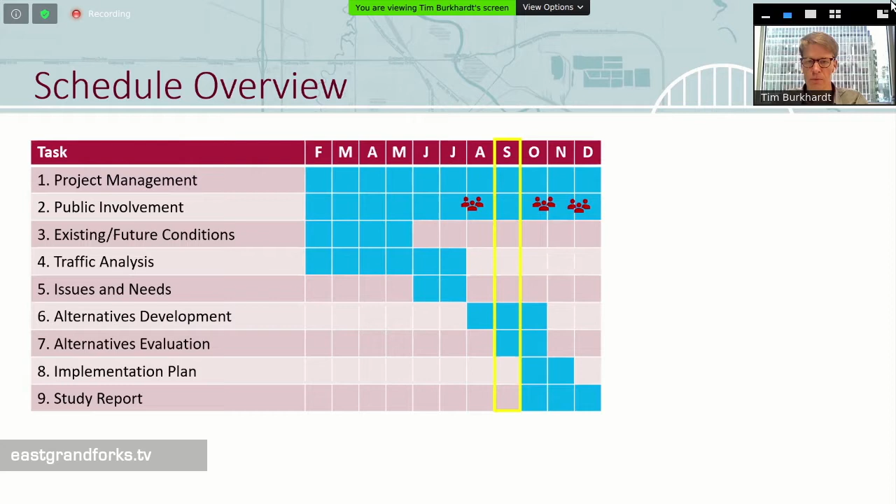As usual, I just do this to review and share where we are. Here we are in September, headed toward being concluded with everything by December. I think we're in a good place, but plenty of work to be done, including our evaluation and sharing those results.

This list keeps track of our consultant deliverables and what we're working on. So we'll talk about the future traffic for the 2 bridge options and the no build, and then where we're headed after this: putting together that direct comparison evaluation and some graphics to pull everything together and see what we've got with the different options.

So that's probably the moment we've all been waiting for, but today it gives a preview of what we're seeing in the traffic results.

So, public open house recap: what we did and what we heard. The purpose was to make sure people are aware of the study, and specifically to share what we call the purpose and need - essentially why we're doing it, what the needs are - and the future traffic and safety information without the project, what we call the no build, and then get input on both of those items.

Recap: we did everything we could to make people aware of the project and the opportunity to participate, with paper and electronic notices and use of our project-specific website. We also did a live presentation - I know a couple of you were there, which I appreciate. This was back in July, which already seems like a long time ago. That was also live streamed, and the presentation was shared on the website, which we kept open for 3 weeks for public comment.

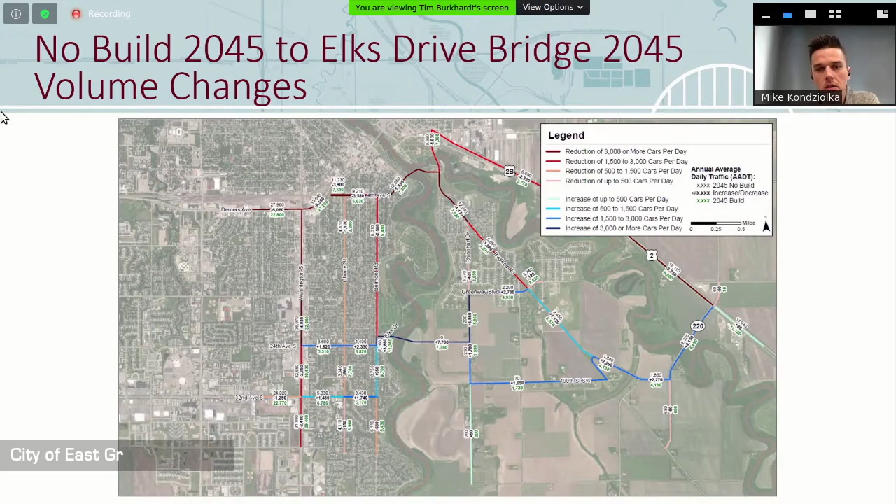We can hop to the next. Part of this little summary here is just to show that for the bridge specifically, most of the traffic that would be anticipated to use the bridge would be using that by the 2030 year. There's not substantial growth that would be expected between the 2030 and 2045 forecast years.

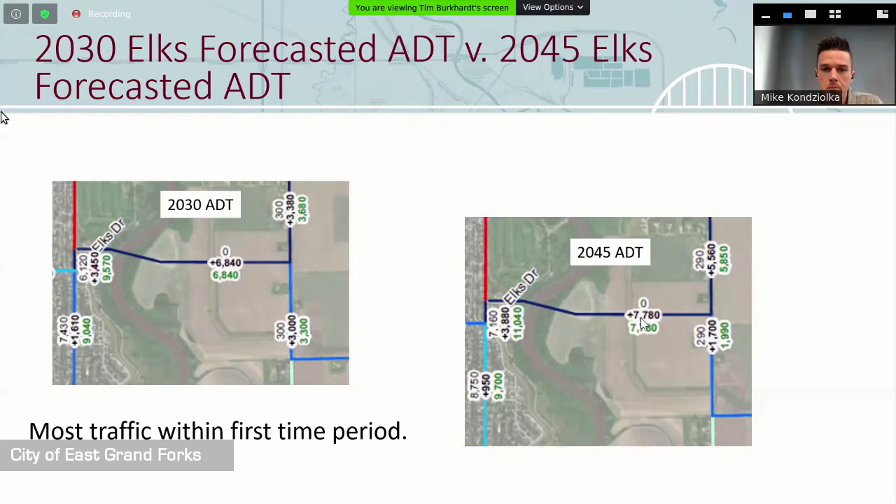I just wanted to highlight that you do see lines that cross the river and represent a bridge location, but I want to make it clear that these lines by no means are a final line that show where the actual bridge alignment will be. It's just a conceptual line showing you how we would connect 32nd over to Rhinehart, and there's a lot of wiggle room as to the exact alignment if and when we do come to construct a bridge at this site. 32nd Avenue is obviously a touchdown point on the North Dakota side.

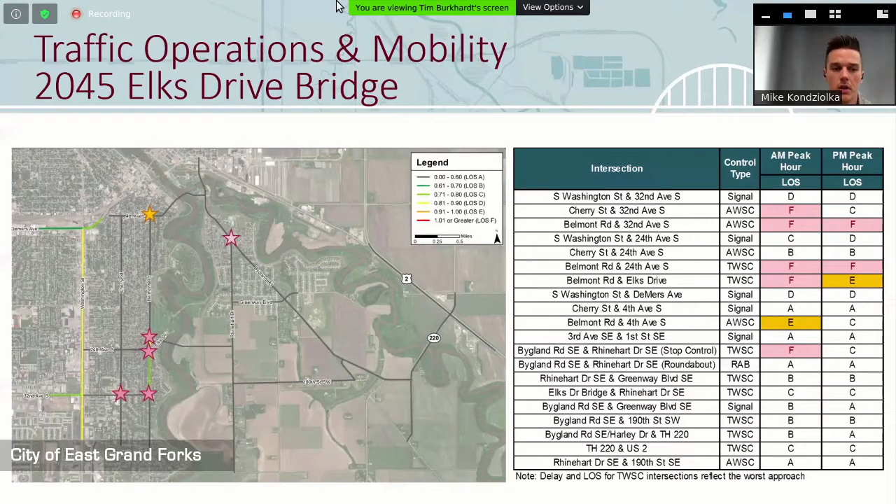No, I think what you're saying is accurate, and it's more reflective of the intersection operations than the roadway segment. So what you're saying is true, and that's what's shown. The delay that would be expected with that movement is showing up here in the models with the level service F at the intersections, so it is being represented. That roadway segment is more looking at it from a daily capacity standpoint — does the roadway have enough lanes to adequately service the daily volume? So it's kind of looking at these from different standpoints, but the peak hour operations at the intersections are showing significant delays at those locations.

Does that make sense, Tanya? Yeah, I drive that every day. If you're trying to turn people left and get people from Belmont, and then offload people, it's a bottleneck anyway, and then that's a really tight space. But anyway. No, that's a good point.

All right, we can look into the 32nd Avenue operations here.

So looking at the 2045 forecast here at 32nd for the 32nd Avenue Bridge, a few different locations are expected to have failing or unacceptable operations in terms of traffic operations.

4th and Belmont is still expected to operate at level of service F in this option. Then on 32nd, both Cherry and Belmont would be at level of service F, and the same conditions over on the East Grand Forks side on Bygland at Rhinehart and Greenway, as was in the Elks Drive option.

Similarly on Washington, looking at the roadway capacity in the segment analysis, similar conditions. We've got level of service D on Washington between 24th and Demers, but no orange or red segments on this by 2045 with the 32nd Avenue Bridge.

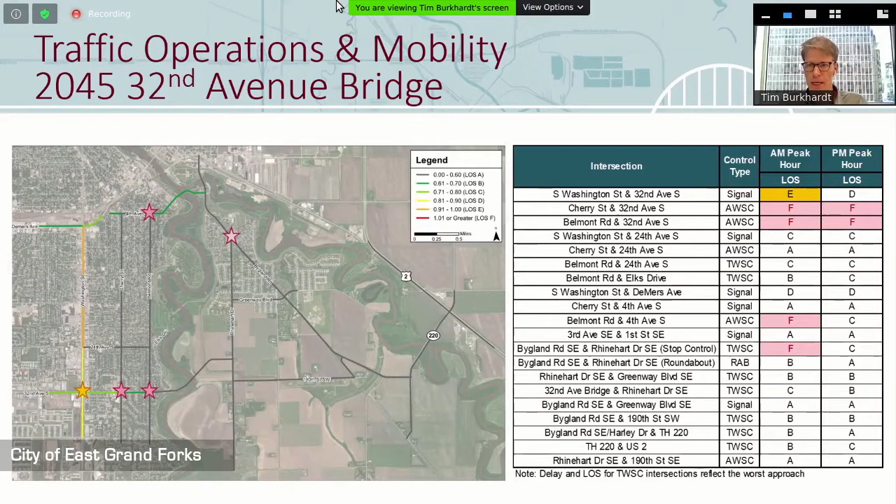Yeah, no, that's the actual question is, when you look at the residential area to the south of that, right, is it not enough of that residential area going south now with the new bridge and utilizing the new bridge? That's really the question.

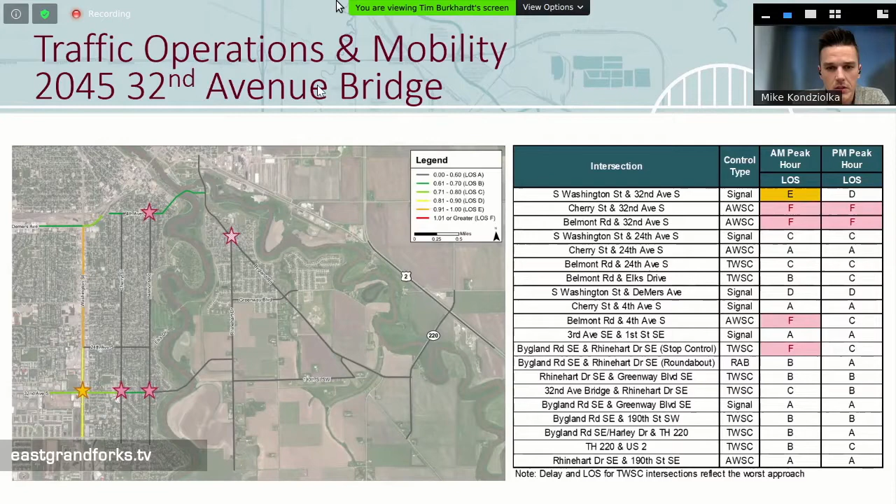I think it's kind of a bigger picture, and less isolated to the specific neighborhood south of here. It's more of a regional shift. There's volumes coming from 220 and from the north as well. This is kind of a summary, so there are volumes coming through here. I think it's more reflective of the fact that the side street stop control on Rhinehart, under any condition, wouldn't be sufficient for 2030 or 2045 volumes.

Got it, okay. And I guess maybe looking at where this intersection is in relation to the existing bridge versus, I guess this is 32nd, I mean just making this up geographically, but the question is will the new bridge pull trips from here to the south rather than to the north? Obviously it depends on where they're going, but it's sort of somewhat equidistant, so I guess we wouldn't necessarily expect them to all peel off and go the other way, right?

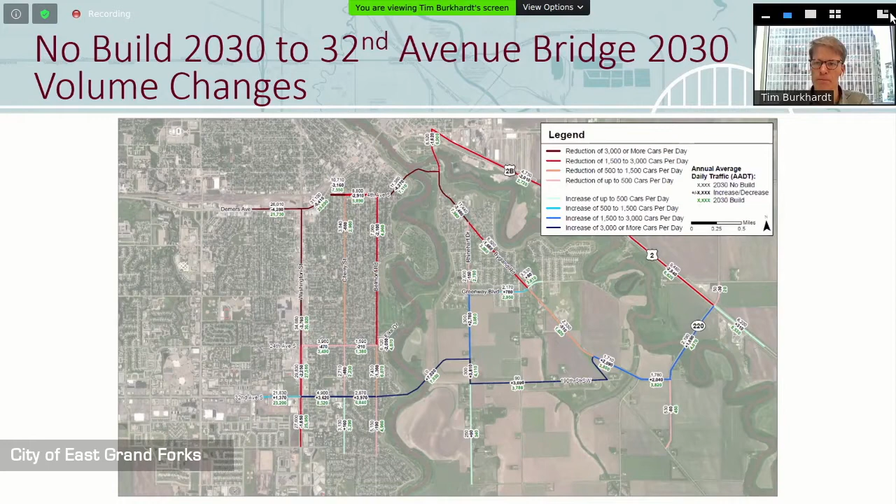Okay, get back to where we were. So how about this? Perfect.

Some similarities, I guess some of the main points are there are expected issues in any case at some of the intersections on 32nd at Cherry and Belmont, and then Belmont and 4th as well. And like we were saying, the Bygland and Rhinehart intersection with the existing stop control, all of those locations would be expected to have failing operations no matter which option, either no bridge or either of the bridge options, went forward. Any questions on this specifically and what we're showing here?

I guess I've got a question, and I'm trying to think of how to say this because I realize it might be a little heterodox here, but as I was looking through this and looking back at the survey responses from the public input session, there were quite a few people that mentioned safety, like the school children going back and forth. So I guess my question is, in those contexts, when we're talking about school specifically, is level of service really the right metric to be using?

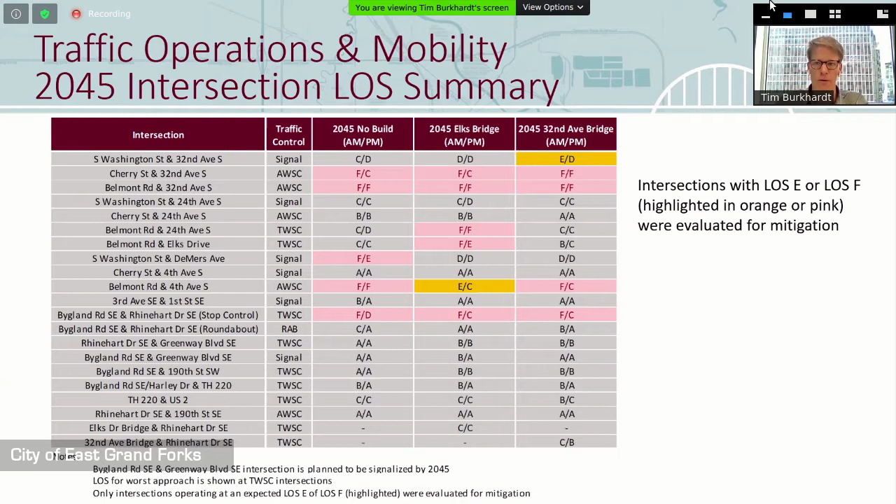Great. So looking at the first piece we just discussed, that was identifying locations expected to have operational issues. The next part is starting to look at options for fixing those issue locations. One of the things we do in that analysis is look at warrants to change the traffic control type.

If it's an existing stop control intersection, there are options, and there's a methodology to evaluate if a traffic signal is warranted at that location based on a number of criteria, but mostly looking at volume conditions. There's also consideration to change if you're going from a side street stop—there are all-way stop control warrants to incrementally build up the control at the intersection.

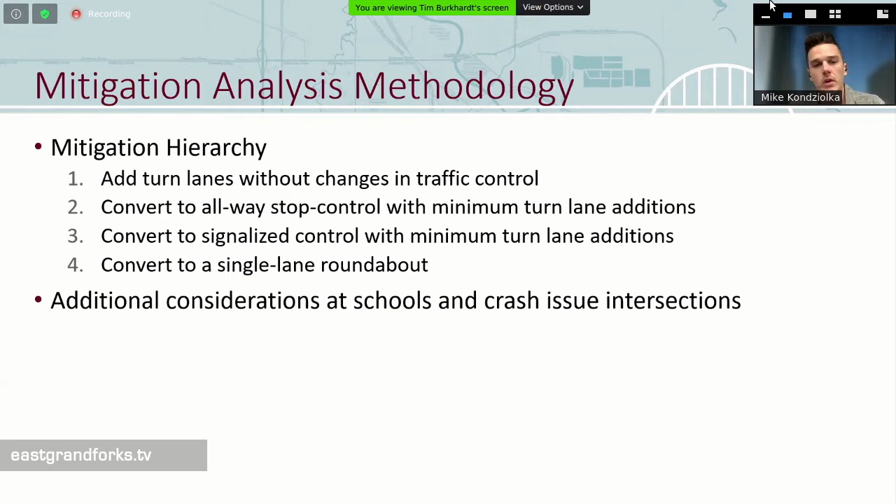Just to note, there are additional considerations that can change the priorities if there's a location with an identified crash issue or with schools nearby, where it's not as simple as just looking at these options. There are safety considerations where some lower-cost solutions may not be adequate for those locations.

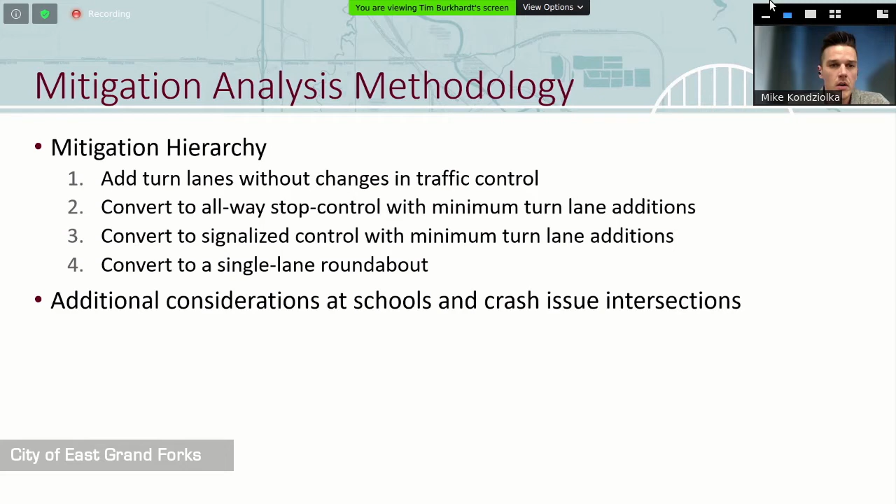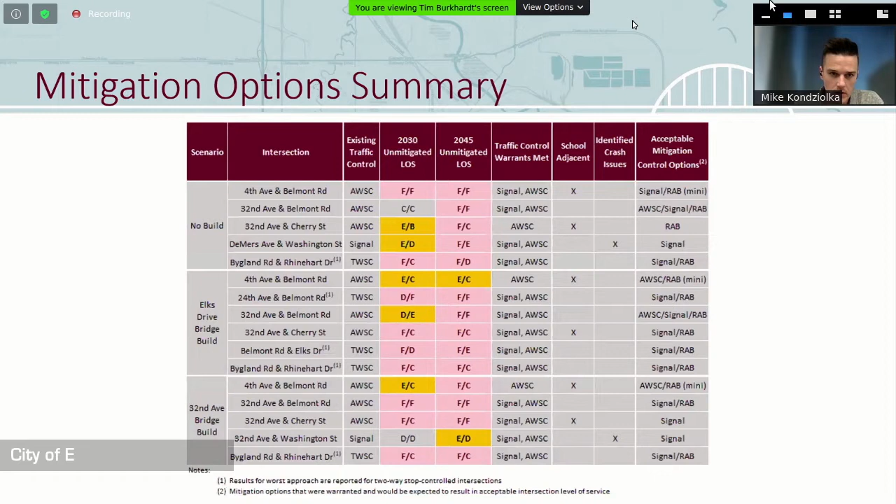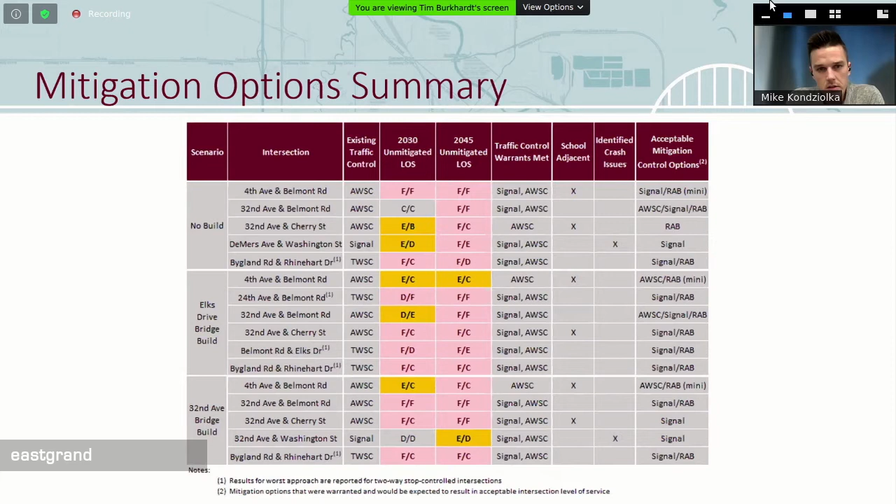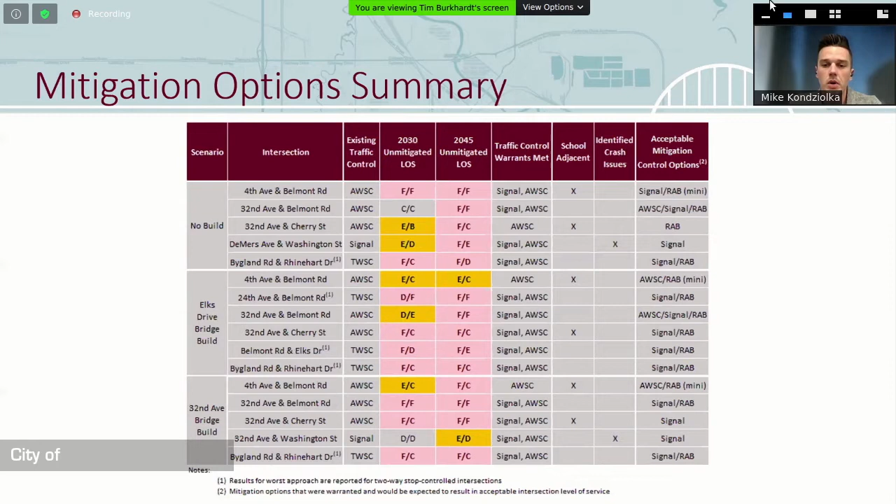This all culminates into this next table, summarizing the mitigation options. Each intersection with an identified issue is shown here—I know there's a lot, so I'll try to break it down. For each alternative, we show the existing type of traffic control and the level of service in 2030 or 2045, then the options for a solution at this location, as in the warrants table. The next two columns identify locations with a school adjacent, needing additional consideration for pedestrian crossings and safety, and locations where the prior safety analysis showed an existing safety or crash issue.

And so with that, this furthest right column kind of summarizes every option for a potential fix to the location that would result in a level of service D or better. So it would effectively improve the intersection.

So I know that's a lot. Is there any questions on specifically what's shown in this table, or can I clarify?

Did you guys look at any other parts of the roadway, specifically 32nd Avenue? I noticed you spent a significant amount of time on intersections, but the school district has schools adjacent to 32nd Avenue between Cherry and 32nd all the way up to 10th. Was that section of roadway also evaluated as part of this study? Because we have a lot of pedestrian traffic that likes to use that as a crosswalk.

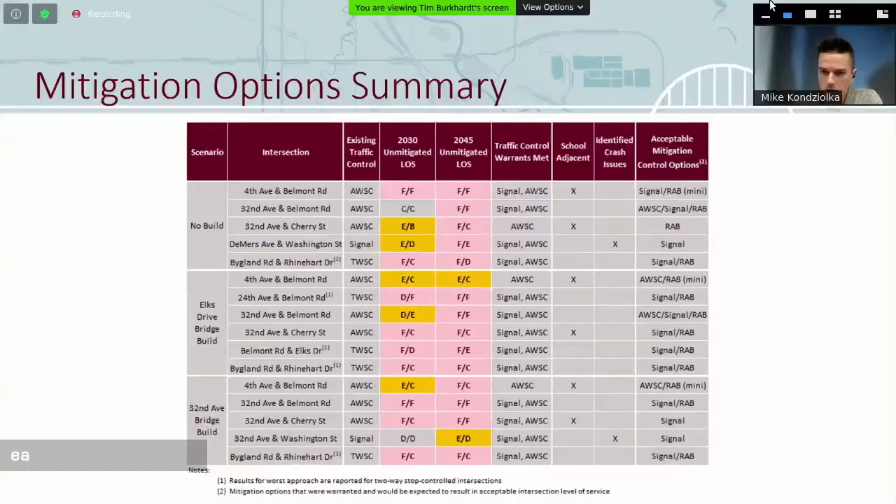Right, and that would be one of these locations that would be called out as school adjacent. So the traffic analysis did look at the roadway segments there, they were included in the model. The specific driveway locations were not analyzed as part of this higher level planning study. Those are, of course, a specific consideration, but this looked at operations on the roadway and at the intersections adjacent, and then in terms of what would be an acceptable solution for those locations, that's where we flagged these school locations where pedestrian crossings are definitely an important factor.

We would like to see more study on that 32nd corridor specifically, and how we would address mitigation for pedestrians utilizing that corridor as a crosswalk. I'm trying to drill down to, as we have kids crossing not at intersections, how we would safely mitigate and address that, because I understand that to be a very large concern from both of those communities.

Absolutely. And that's coming from Chris, right? Correct. Yeah, if I could just jump in on schools.

I was saying to Earl earlier today, from the first time we started working on this study and started to get to know the issues, that schools issue came up immediately and hasn't stopped. So that's been in our minds, and it was one of the reasons, even on this table on the screen, which otherwise might not have a call out for schools, we wanted to make sure to highlight that, because it is both a need and an opportunity.

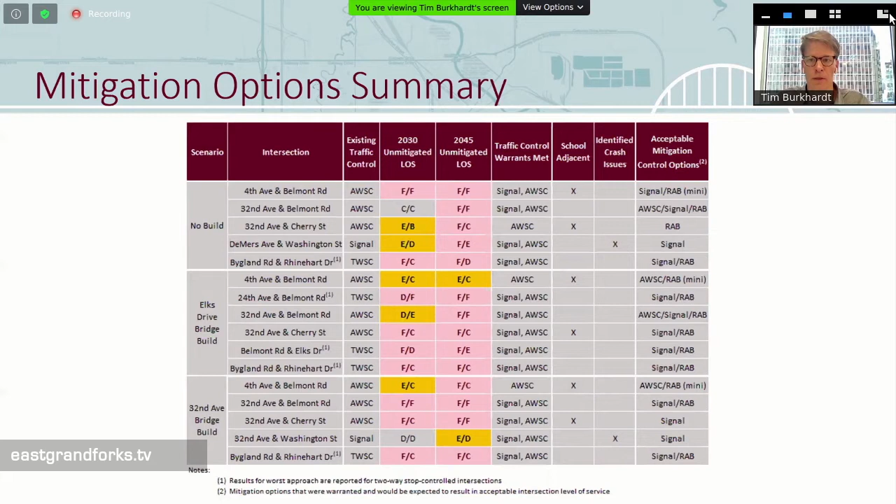Yeah, jumping ahead, depending on where the study concludes, there may be a caveat or condition, whether that comes from the study itself or from others, that certain further study or what we'd call mitigation needs to be considered, even if it's beyond the level we're going to here.

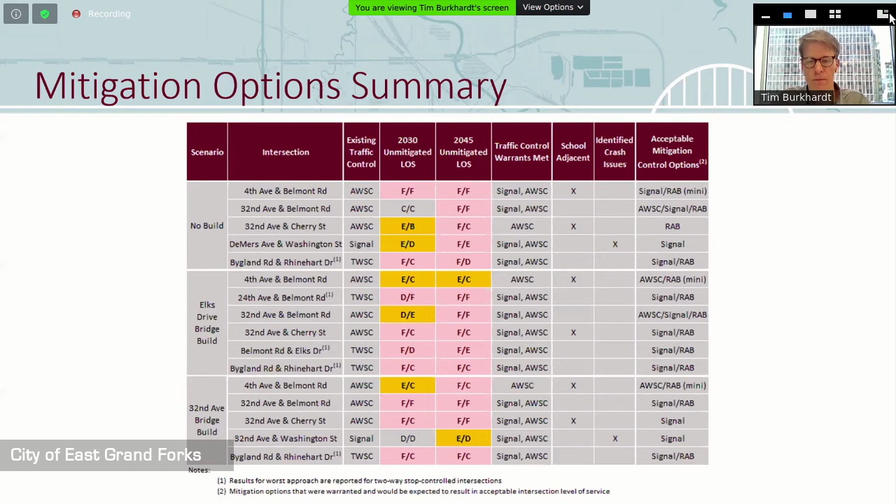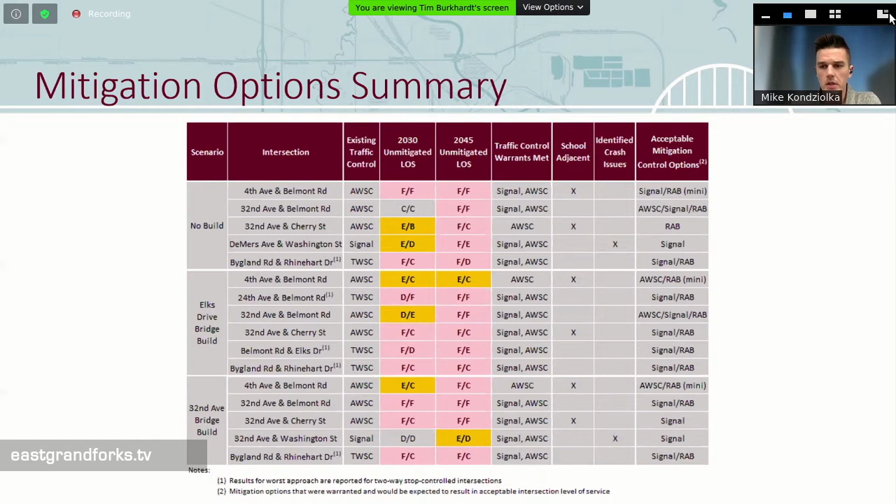Okay, let's move on in the interest of time. Mike, I'm not sure where you were on this slide here. I think we covered this, and we can look at the next one here and start to get into the assumed mitigation.

This next piece is one of the last pieces. For the purposes of this study, we need to assess the universe of options for mitigation on that prior table in the last column, and then hone in on a specific one just for assessing a cost for each option, looking at these globally. What would the cost of one of these alternatives be in order to bring everything to an acceptable level in terms of traffic operations?

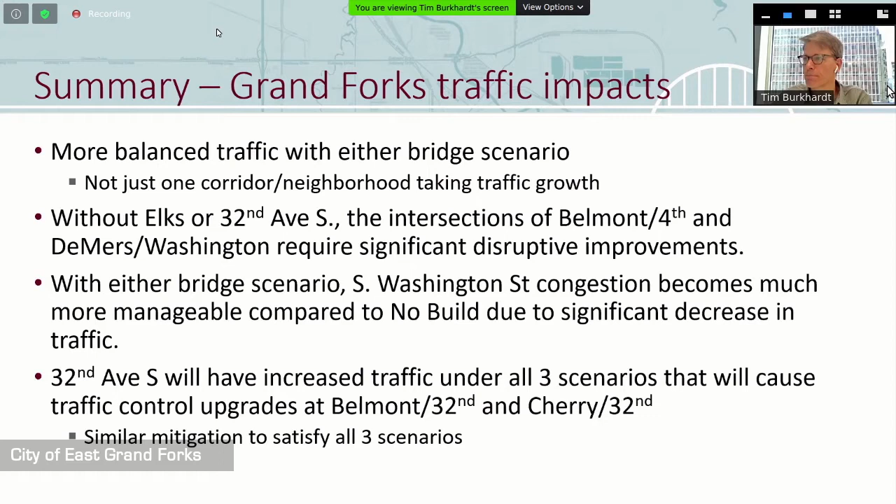So, I do want to stop and ask for some input, but we have a couple more slides here. I think we won't have quite as much time for my round robin, but maybe it'll be more of a lightning round. Let me turn it over to Earl to talk about the land use plan.

The one thing for this study group to be aware of is that the East Grand Forks land use plan really doesn't have a lot of changes that are specific to this bridge question. There are changes, but there's not a big, massive change happening on the East Grand Forks side in their land use plan. So it won't have much of an effect on our traffic forecast for this bridge study.

On the Grand Forks side, we're further behind on where we're at compared to East Grand Forks. The one thing that would alert you is that on the Grand Forks side, we are talking about doing a higher annual growth rate of population than what we have in our current plans. So simply, more people will mean more trips. And depending on where they're located, whether south or west of the interstate, that'll have more impact on the use of these bridges.